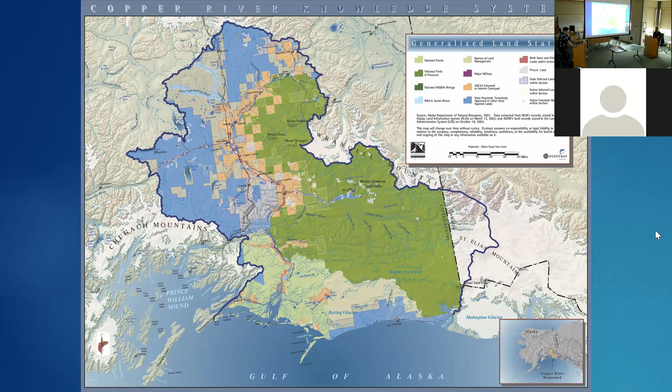So we're located in Cordova, but we work with landowners and resource managers throughout this whole drainage area. And we do a variety of habitat restoration, prioritization, and education programs. And the particular project we're talking about tonight is centered here in Cordova and is within the Eyak Lake watershed, and that is the Weir. And we'll just keep carrying forward.

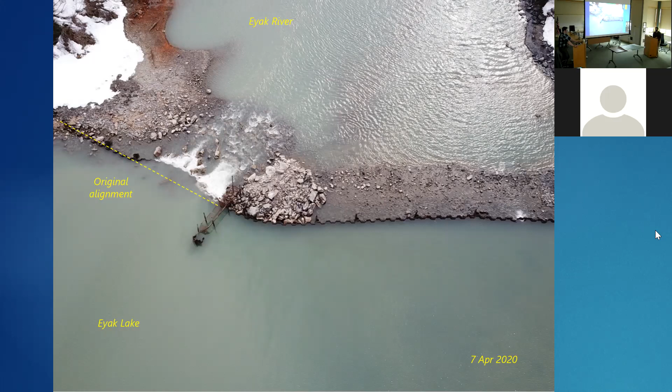Our goal for tonight is to give you a brief update on the history that we've been able to piece together about, Lisa, you can go one more, about the history of the Weir, see what maybe gaps people in the community can help to fill in. And then Ewan is going to talk about some options that we can consider based on some preliminary investigations that we've been able to hire DOWL to help with looking at the site.

But really, we want to make sure that we're hearing from the community who uses and lives near upstream or downstream of this structure, and both use that to inform the future vision and make sure that we understand the complete story about this site. So again, thanks to everyone who's tuning in either tonight or afterwards.

So just to make sure everyone understands where we are in this process, we're at the very beginning of this timeline. We were able to work with DOWL to get a complete site survey. So we've had surveyors in town. We've been working on a hydraulics and hydrology report that analyzes the water that flows through Eyak watershed and helps to determine how different structures can influence what the water's doing as it passes through the watershed. And then they're helping with some alternatives that we can consider for what we do at this site.

And with all the information that we're collecting from these investigations, we want to match that with community input. And then we're using all of that to resubmit an application to the Exxon Valdez Oil Spill Trustee Council at the beginning of August. And it is likely to be an expensive project. And so that proposal opportunity provides the best chance in our foreseeable future to get some significant funding to be able to bring some upgrades or improvements to this site to fruition.

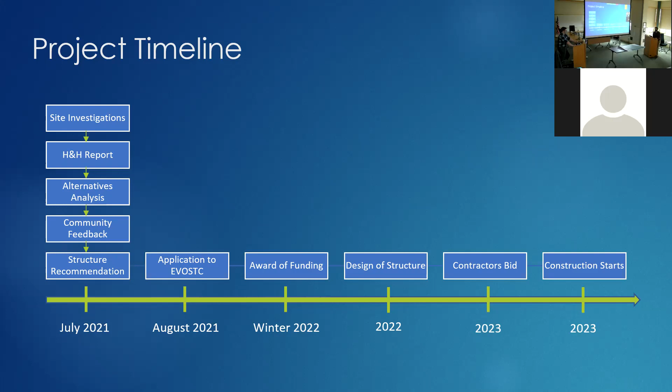So I just want to call that out, that this is the path that we're choosing, in hopes that we have that time to build in the local expertise and input and come up with a vision that meets multiple goals, rather than have a rush job that has to do something in case of a catastrophic failure. So we'll move on to the next slide.

I'm excited. I had a chance to do a little bit of investigative journalism and work with the Cordova Times and go through. I knew that the Weir was constructed in 1972. And the very first edition of the Cordova Times in '72, January 6th, the letter from the city manager was all about a community workshop hosted by the City Council to talk about the dropping lake levels in Eyak Lake and concerns over the exposure of the nearshore spawning habitats that would result from that. And everybody at that meeting was in favor of a Weir.

And so I'm hopeful that, almost 50 years later, Cordovans are still able to be supportive of this idea. But it was something that was vetted by the community initially. So the earthquake that happened in '64 is what motivated this community workshop, because this area was uplifted as a result of the earthquake, and then the lake levels dropped as a result of that uplift.

So the contract was awarded by a department within the state of Alaska that no longer exists. And there's been a very big challenge to find any paper trail to understand who owns the Weir, who built it, whose responsibility it is to maintain it. And so for the last 49 years, nothing has happened. There's been a couple attempts by DOT to maintain it. And I've talked with Jack Stevenson because it was during his tenure with DOT locally. And because of the challenges around ownership and access and permissions, they were never able to follow through with any actual maintenance.

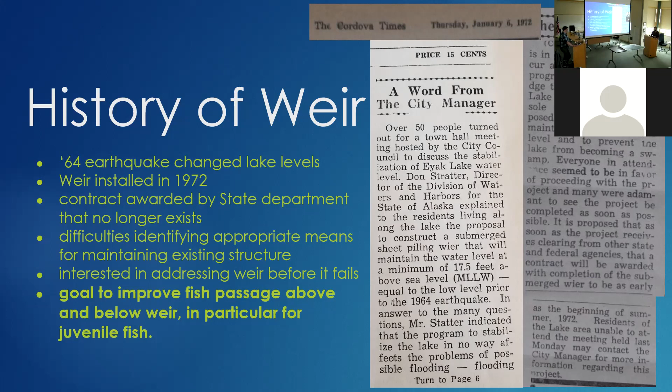So we are interested in maintaining the lake levels at the rate that they are now, for the original reason that the Weir was built, so that the spawning habitat stays submerged. But we also want to build upon that original design and improve the fish passage, because that was not something that was a core part of that original design.

So I just want to emphasize that there are many impacts to this lake. We're calling it Cordova's multi-million-dollar lake now, because the ex-vessel value of the commercial fish from Eyak Lake is estimated to be almost $2 to $3 million, estimates by Fish and Game. And so anything that we can do to maximize the productivity of the system, be it maintaining lake levels to keep spawning grounds underwater, to improving movement of the juvenile fish species above and below the Weir, is going to help species of fish that are important for their intrinsic value, but also for their consumptive value and the commercial value here in Cordova.

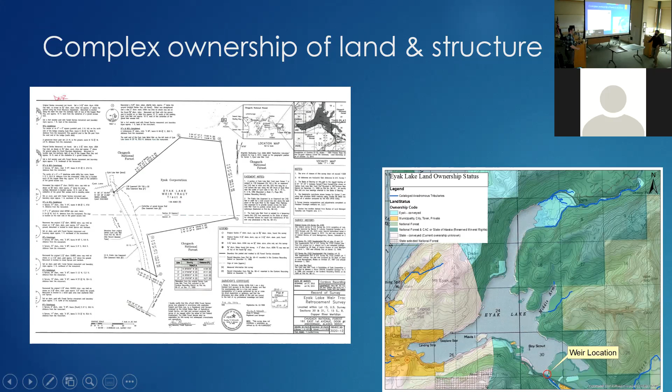Now that's what you call too efficient. There we go. Let's give it one. No. Oh, it's jammed. There you go. So let's give that a try.

Excellent. Okay. So who am I and what do I need from you? I am Ewan. I'm the lead investigator and designer for DOWL, and that's the engineering company that Copper River Watershed Project has involved to help with this project. What I'll do tonight is show you where we are in the project and what the feasible alternatives are. By all means, this is not the end list. We are very much open to comment and investigating essentially what will service the needs of the community.

And just to echo that, I am here to listen to you. I'm not here to sell anything, essentially. I'm interested to find out how you use the area, what your memories of the Weir are, and what your likes and concerns are. And there is no question too simple to ask. What I'm here to do is to make sure that you come away with an understanding of the process and what we're trying to do. So with that, I will go into the presentation.

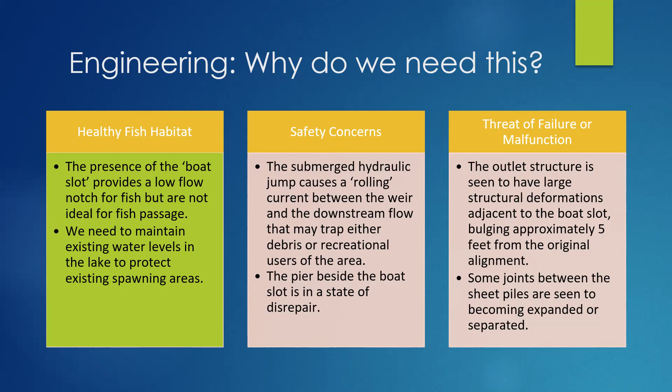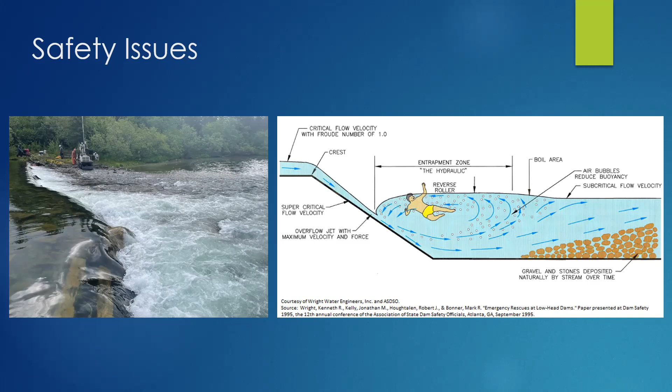So, based on our 3 identified needs, we came up with our project goals from an engineering perspective, and this very closely mimics what Kate was saying. We want to make sure that the design life of the structure is there, as well as having a reliable structure. We want to improve the environment for fish spawning or fish passage, improve public safety, like we just mentioned,

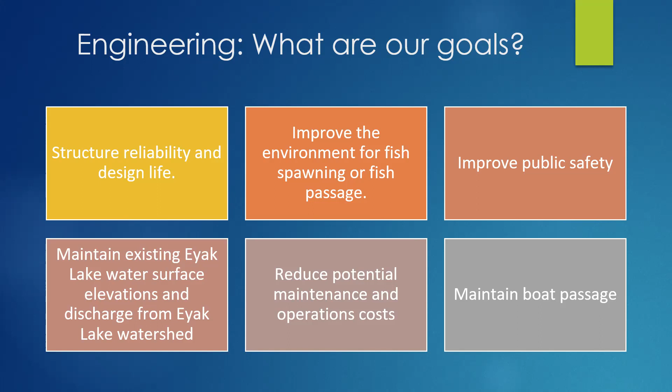maintain existing water surface elevations at the lake, as well as the discharge going forward into Eyak River, reduce the potential maintenance and operational costs for the new structure or proposed structure, as well as maintaining boat passage to at least the same level as that currently exists.

So just now I'll walk through 4 alternatives. I will show some images of similar constructed projects that have been done before, as well as the description, and then I'll show an aerial image, like the one on the left-hand side, with some commentary to make sure that we can identify the design.

So with alternative 1, that's primarily for us to compare the alternatives, but I'd also like you to take this opportunity to comment on what your likes and dislikes about the Weir are and how you use it. So when you have an opportunity to talk about what you like about it, this is the alternative to comment on.

Now, for alternative 2, this looks at the rehabilitation of the existing structure. So we want to look at improving what is there and then reinforcing it, as well as adding the potential for better fish passage and boat passage. We've got a project here down in Idaho where we see an existing low-head dam, very similar to the Eyak Weir, after improvement works. And this is a natural-looking fish passage.

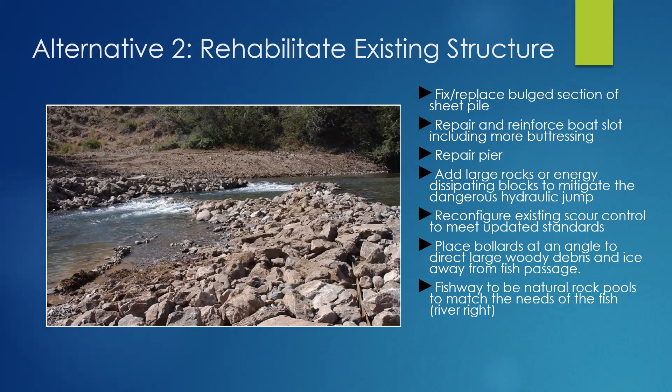On an aerial, this is the general location of things. So we'd have the rock pool and riffle fish passage on the river right. And when I say river right, I'm looking downstream, essentially right beside the highway there. And then we have the fixing of the bulge.

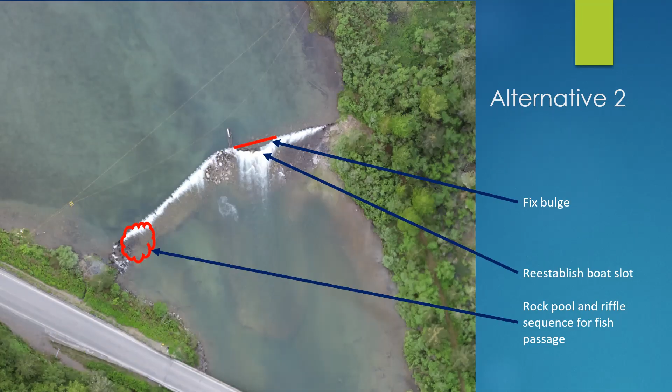Going on to alternative 3, this is replacing with a new sheet pile structure. And rather than removing the old sheet pile structure, we'll put the new sheet pile structure immediately in front or within 5 feet of the existing structure. This saves in costs for removing that existing structure. This allows us to design a sheet pile structure that's up to code and safe, but also allows us to create a compound structure. So we see here that there's a fill between the 2 sheet piles. We'd want to compact that and make this one homogeneous structure to make it more resilient.

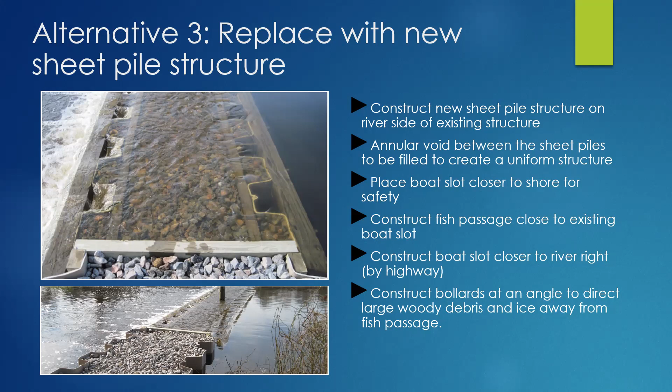In this alternative, we would look at placing the boat slot closer to shore, so closer to the highway, and then have the fish passage closer to the existing boat slot. And this has the same opportunity to put a series of bollards or another structure to deflect debris away from the fish passage. So as I was saying, we've got the boat slot closer to the road, the rock and riffle natural fish passage closer to where the old boat slot was, and we're fixing them into the existing structure with a new sheet pile weir immediately in front of the old one.

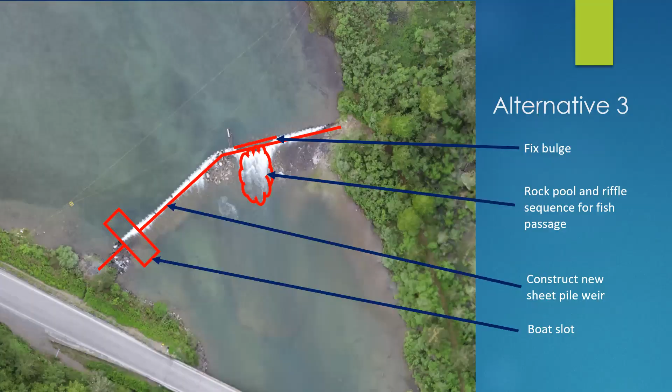In alternative 4, we are going to propose reinforcing the existing sheet pile weir with rock, both upstream and downstream, making it more of an embankment, and placing multiple rock weirs downstream of the weir to decrease that hydraulic gradient and make it more friendly for fish passage. This has the benefit of increasing energy dissipation and reducing the velocities downstream of the weir. And it helps with removing those safety concerns of the rolling hydraulic.

It does, however, have an increased complexity of navigating for watercraft. As you'd imagine, a lot of rocks in the river is not what you'd want when you're taking your boat up and over the weir.

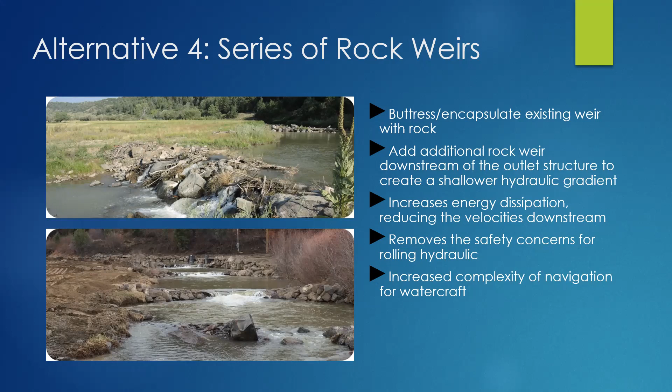Now, just to sum it up, and here's the aerial image. So we'd have rock upstream and downstream of the weir with a fish passage structure there with additional rock weirs. And we don't necessarily know the amount of rock weirs or the spacing of them just yet. We will have to wait until the design phase to know exactly where they'll be placed. But this just gives an indication of what that would look like in an aerial image.

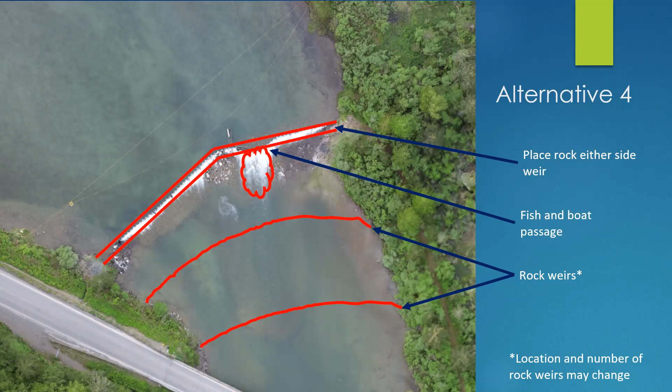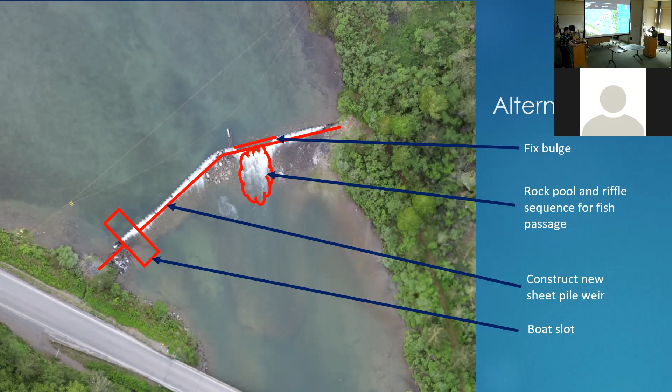And Ewan will also be in town this week. So if later tonight you have an, oh, I forgot to say, or wait, what's the answer to this? You can either contact our office, or on the last slide of the presentation is Ewan's cell phone number. So you can fire it up, blow him up there and give him all the insight that you have. Because he doesn't even live here, so he knows less than we do about how it's used and appreciated and valued by the community.

He knows a lot more than we do about the water that moves through and what is underneath the level of the water and the substrate in the ground. So it's great to have his expertise helping us with this little bit of a challenging project.

And just again, our timeline is that we will be rehashing with the partners that are helping to submit the funding proposal. We'll be convening with them next week. So encourage people, if they haven't filled out the survey, to please do so, or to contact us directly with comments so that we can incorporate those into our discussion. And then keep your fingers crossed that we'll be reaching out with funding in hand to be able to move forward with design and construction or maintenance of the structure.